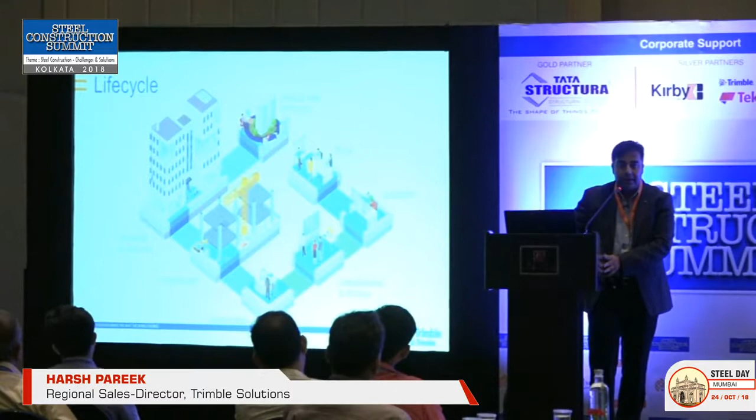I represent Trimble, and what Trimble is trying to do in terms of solution side is basically cover the entire construction life cycle. I'm not talking design only - please understand, design is just a part of the overall construction life cycle.

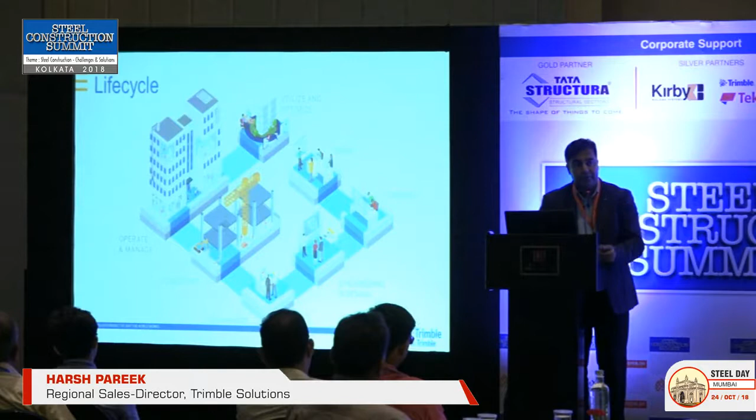In my following slides I will be touching base on some of the stuff which you would have heard many times in recent times. However, right from the conceptual design to operation and maintenance and overall utilization and optimization of your space - how we achieve it, that's the goal Trimble as a solution provider is trying to bring in.

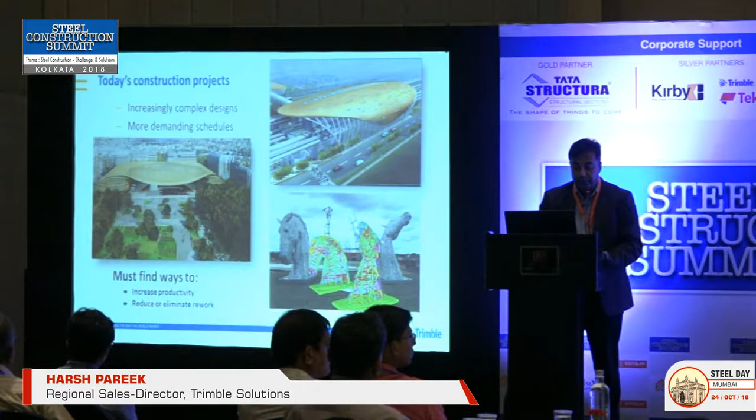So the two aspects which we definitely need to find ways out is: how do we improve our overall productivity, and reduce the redundancy in our overall culture of the way we work. That is where we spend our maximum time, that is where we waste maximum of our time.

Sometimes I can be very provocative - I am sitting in front of people who are our users. However, it is the fact of the matter that we definitely lack in communicating our design intents. How do we manage our information? That is still very, very manual and rudimentary - the way we manage information transfer, emails, fantastic ways we still consider. But I think now the systems have changed quite a bit. And the change coordination is still a big challenge.

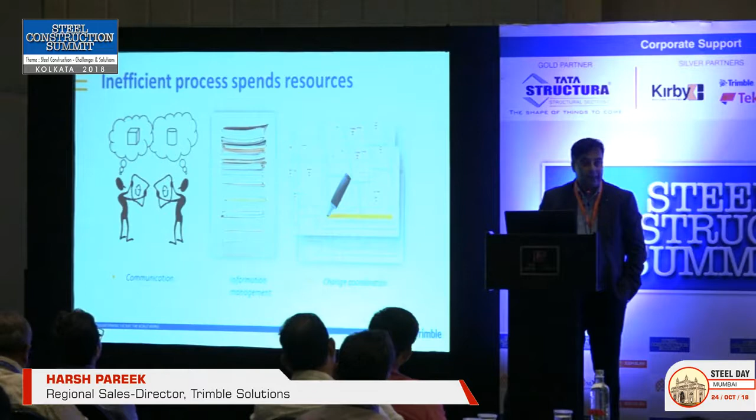Document-based approach, we are still following up. There is no denial - I think everybody, architects, engineers, fabricators, detailers, we are still following this approach. So what is the way forward?

The way I see from the technology side and the kind of development which is happening - I worked with the fantastic design solution provider called Autodesk, and now I work with a set of company which primarily provides in construction, which is Trimble. Everybody is focusing on the digital way of driving the information exchange.

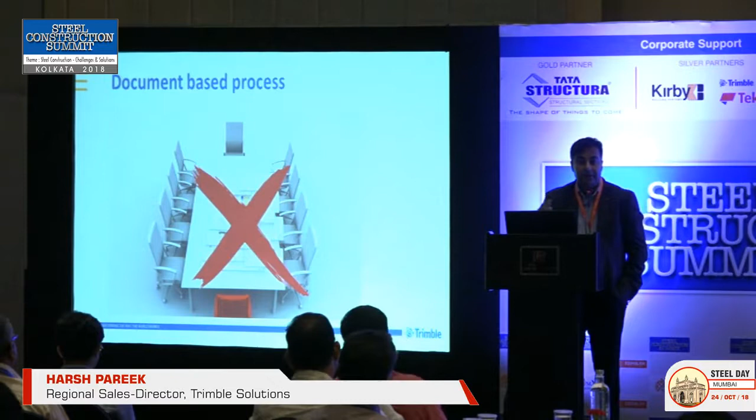And that is where we see this chart is very relevant. If you look at the overall construction life cycle and the different stages of it, right from strategic definition to concept design to technical design to commission handover in use, at every level there is a repetitive job of creation of information which happens.

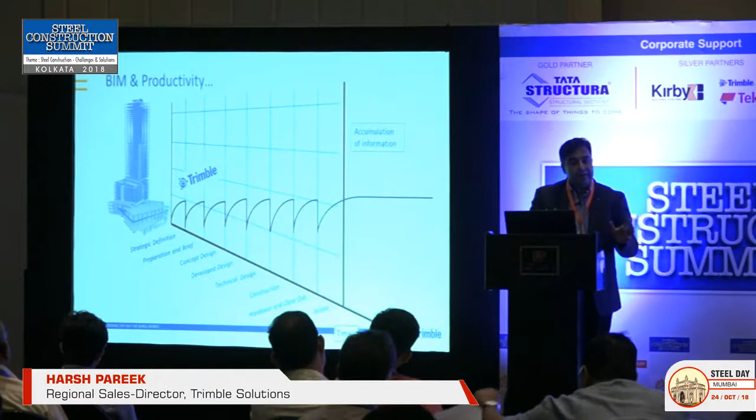Architects create something, a concept, and when it comes to the detailed stage, I don't think that conceptual model, we use it or reuse it. I think we try to redevelop everything from scratch. Once the architect finishes the job, when it goes to the structural engineer, nobody wants to reuse that model which the architect would have done, or the MEP engineer would have done. The contractors would just be depending on the set of drawings.

Coordination is absolutely - though we say we coordinate it and somehow it is working, but going forward, if we continue to do it, it is the right time that we adapt to these new changes. And what this new era is going to change is that the accumulation of information which is happening at every stage, we basically try to streamline, and you can see the clear growth.

That is the primary difference between a manufacturing segment and a construction segment. Steel is all about manufacturing process, right? And even concrete nowadays needs to be on that path where the information - we call it PLM, a very known word, product life cycle management. And here we talk about CLM as construction life cycle management.

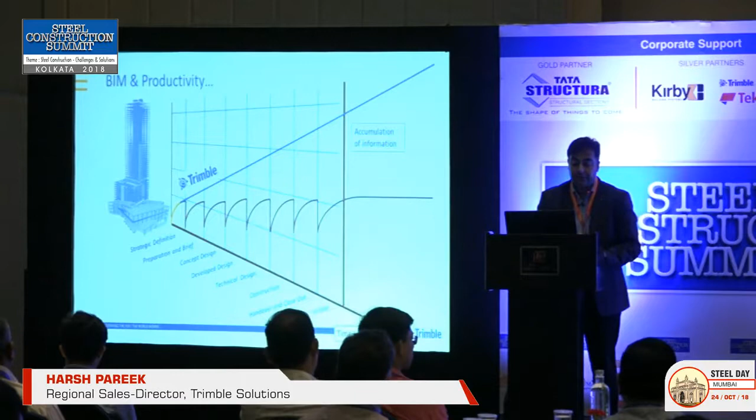If we want to improve our overall efficiency and productivity, then I think that single source of truth needs to be utilized at all the stages of our construction life cycle. So what I am introducing is a term called constructability.

How many of you have heard about BIM, B-I-M? I'm sure everybody talks about BIM. Yeah, it is necessary. It's a building information model.

However, the right benefit of BIM models is not being seen in practice in India as of today. You know what is the reason? Because I have lived in both the eras, especially on the technology side.

The problem is BIM is still being catered only to the design aspect of the problem. And the person who is actually making the structure, who is executing it, for him it is of no use today. For him it is like, I just need the drawing, I need to execute it, why should I use it? But that is the aspect I'm talking about, why he is unable to use the information created by a designer, because the designer's responsibility is only up till the geometric level, not at the constructability level.

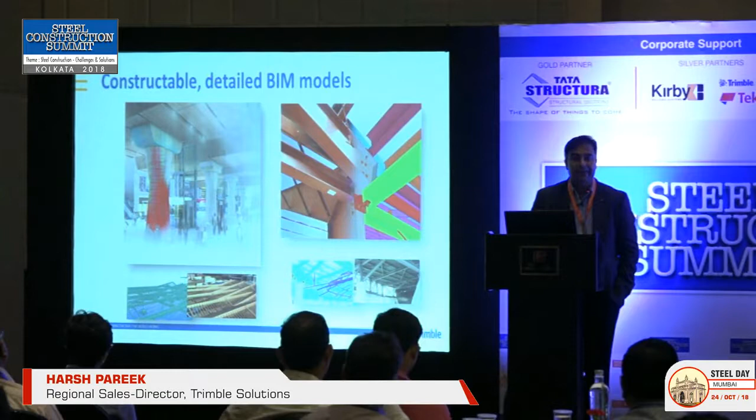So let's take an example. On the left-hand side, what you see is primarily a concept model. It's a very crude way of representing the stuff, please excuse me for that. However, I'm just giving you this.

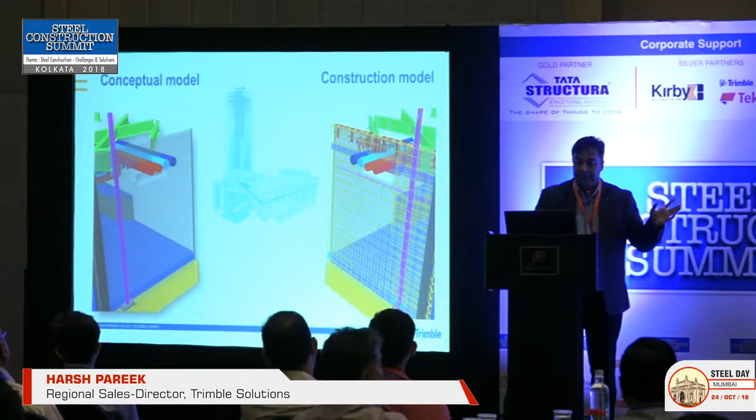When a structural engineer's engineering responsibility is primarily up to the LOD, level of detail 300, what is that? That I will only limit my responsibility up till the geometric aspect of the design.

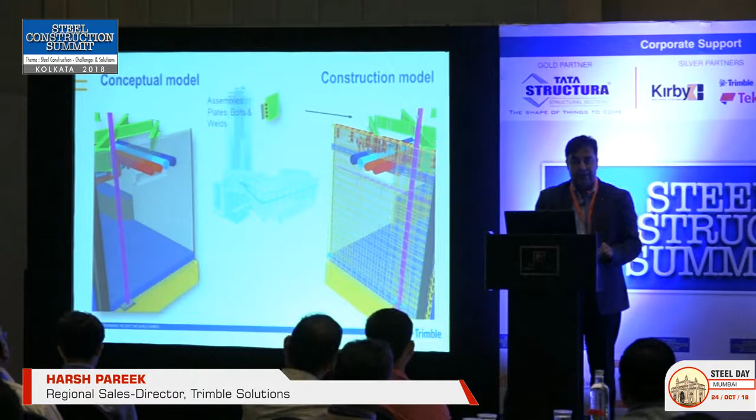But when it goes to construction, people are more worried about how the plates are going to be fitted, how the bolts are going to be fitted, how the welds are going to be there, where my embed plates are, how, if it is a composite structure, concrete and steel, how the concrete embeds are going to be there, how my MEP and plant design comes, so what is the reinforcement?

Reinforcement is an important part. Tell me how many architects or engineering organizations have a 3D rebar model in their scope of work? None. And when you give it to the contractors, because their scope of work is more, they are more worried about concrete and steel quantity. So they say, we don't have a 3D model, and we will just do it whatever the drawing says.

But that is where they are unable to utilize the power of BIM, and that is what I say, because the current set of solutions most people are using limit their capabilities of use to LOD 400 and 500 level of detail, what I say.

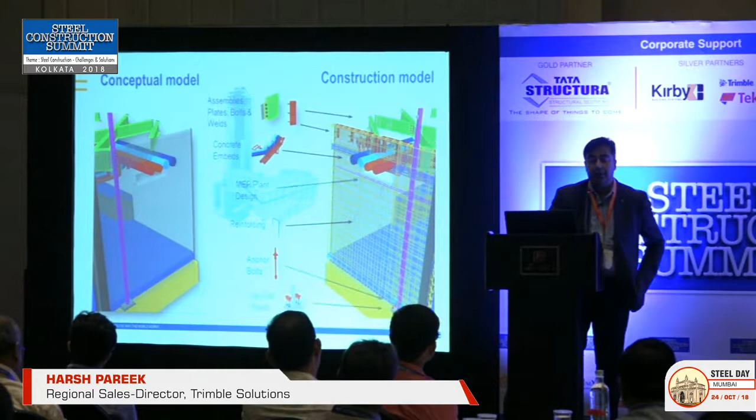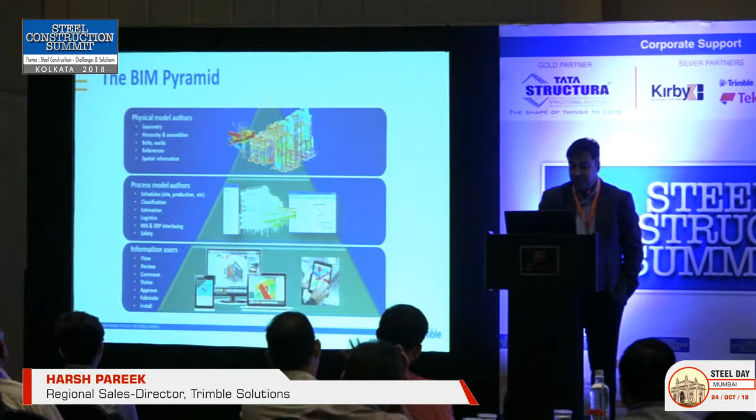So please do not think, why should I do a 3D model, or why should I have a digital model available, not a digital drawing. Even though the drawings are digital, the systems are changing more towards the digital side of it, which is on the 3D concept, and this will be used all across planning, design, construction and operation phases.

I'll just give you a matrix which we do when we do our analysis while developing a product and developing the overall set of solutions for the industry. How do we take it?

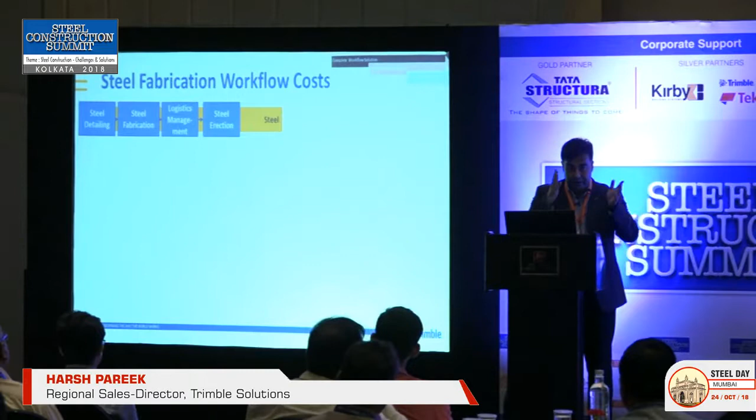Steel fabrication workflow, how the cost is allocated. So there are 4 processes I have written here: detailing, fabrication, logistic management, and steel erection. 4 processes with respect to steel structures.

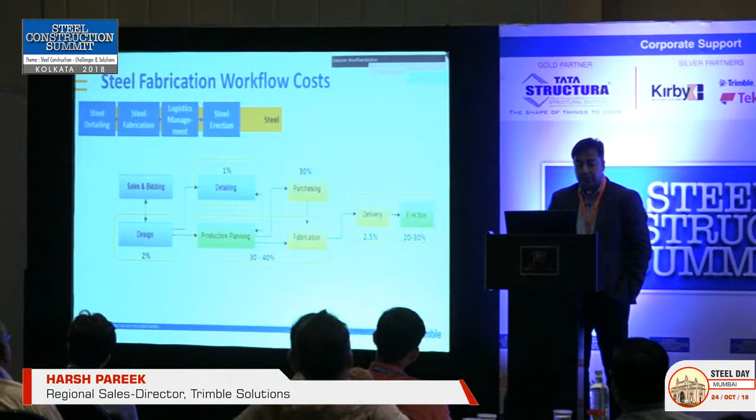This is a study being done by various agencies. And look at this, how the cost is there. People who are focusing more on the detailing and design side, see the cost implication of it. How much time do I have?

Okay, right. So you can see where we are focusing more on the detailing and design side, most important. However, look at the cost associated around that. If you look at the other side, which is production planning, purchasing, and fabrication, it's 30 to 40% of the cost. So this 3D asset, a model having all the information, can create a significant impact on the fabrication side, and lastly on the delivery and erection.

This is a study, probably I can share this. So it very clearly says there are 2 studies done, one by AISC, another by Steel Construction. Both of them are very clear that it is not about detailing and design, it is about the overall process where the money lies.

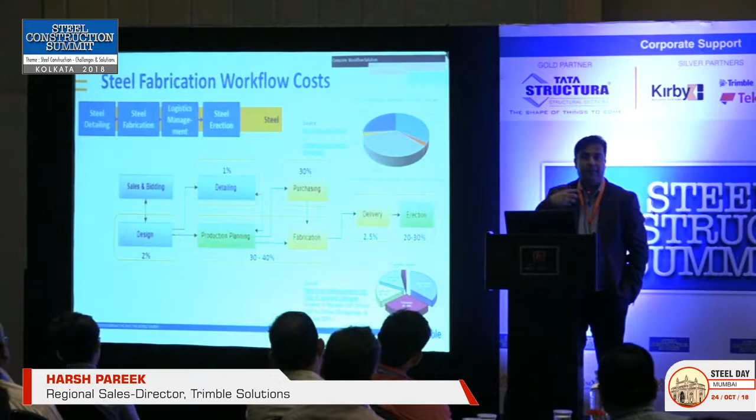If we are able to save even a fraction of what we are spending, I think that is where the value of this overall system lies. So please understand this concept when companies like us say, why don't you do this thing in 3D? It's not about it being forced, you do detailing by this method, not required, because the real value lies there.

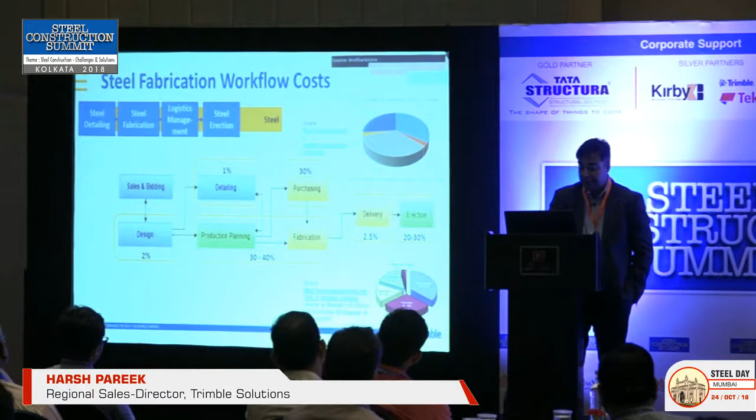You are able to win more projects and show more value to the customers. So if you look at it on the design side, it's whether the cost of detailing or value of model. I would call this a value of model.

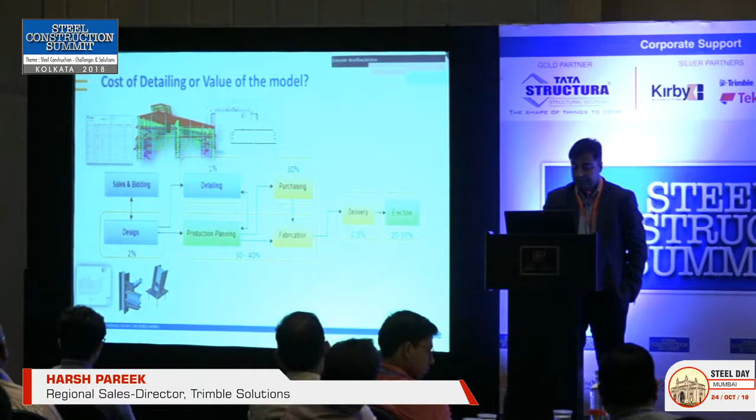Within one model, you have your byproducts: your quantity estimates, your drawings, your connections as mentioned, the automated connections, parametric, anytime you make a change, it changes. Then you have the complete assembly line, linked with your fabrication, and the overall plant is ready.

So you can say it basically increases your chances of winning the project by 10% at the design stage. At the detailing stage, 70% reduction of your cost of rework. However, look at the other side of it, 80% reduction of fabrication man hours. That is where, if we want to reduce the time frame, if we want to be on time and budget, that's where it comes into the picture.

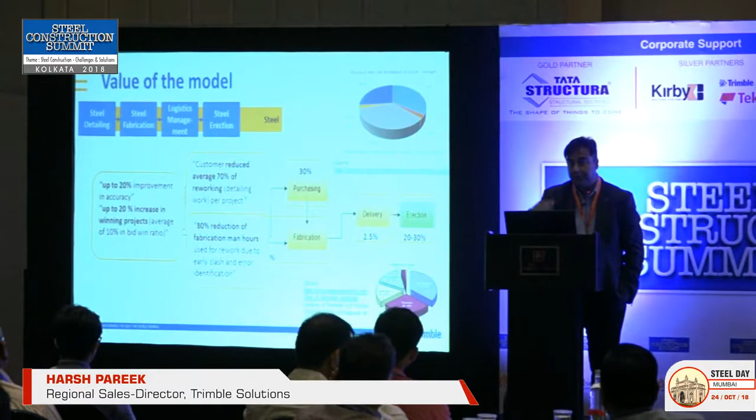And on average, 30% time saved annually, and 25% tons of material saved. These are studies being conducted by various organizations all across, and this is the blended result of it. So that is why it is important, when we are changing or challenging ourselves to move to a different process or different material, that we choose the right intent behind it, why it is needed.

And the value of the model is we can always share it with different stakeholders at the project level. So this is the solution we talk about.

Tekla is not a new product. Worldwide, the software is being used, but the extent to which we are taking it further is new, because it was initially perceived that this is detailing-specific software. But if you actually start unleashing its potential, it gives you value at every stage. And now we have recently added a fantastic tool called FabSuite, which is an MIS tool specifically for fabricators, nicely blended together with this solution, and will be a part of this.

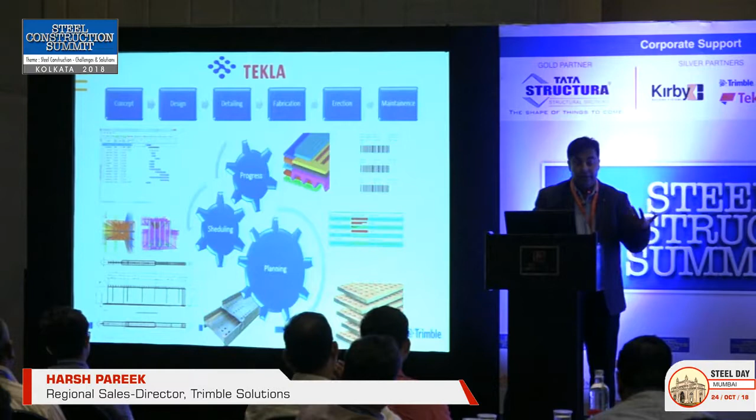Not only this, it's also integrating with analysis and design. So it is not only modeling, detailing, and fabrication, but it has fantastic connectivity with analysis and design, which takes care of your connections as well as your members. There's direct linkage with your PLM and CNC machines, FICEP machines, any kind of machine you have, it has direct linkage with that.

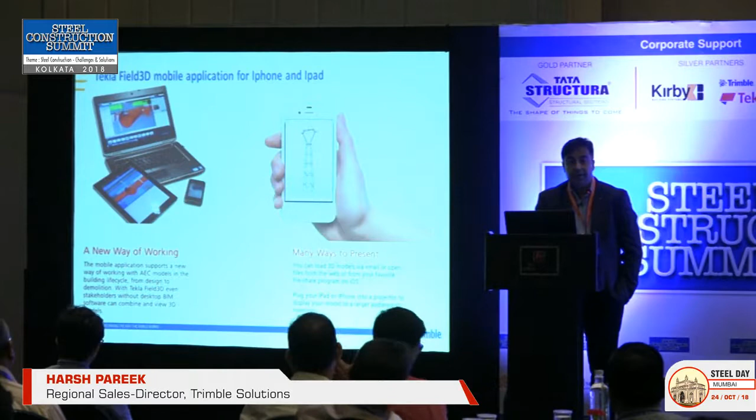Now we have solutions, especially mobile applications. Same models, you don't need to be on the laptops. If you have smartphones, the same models can be transferred at any point in time. You can actually review this.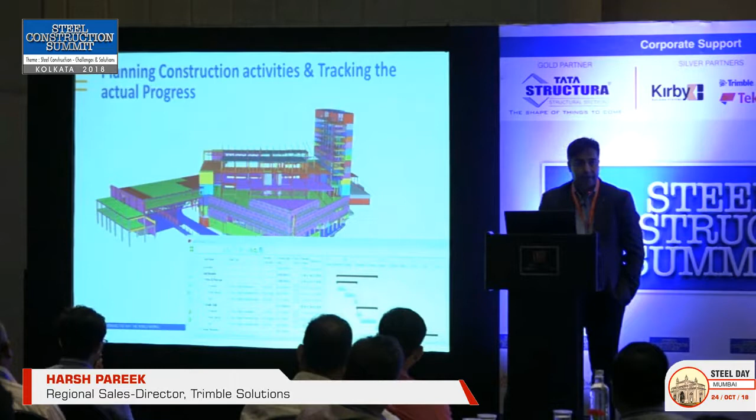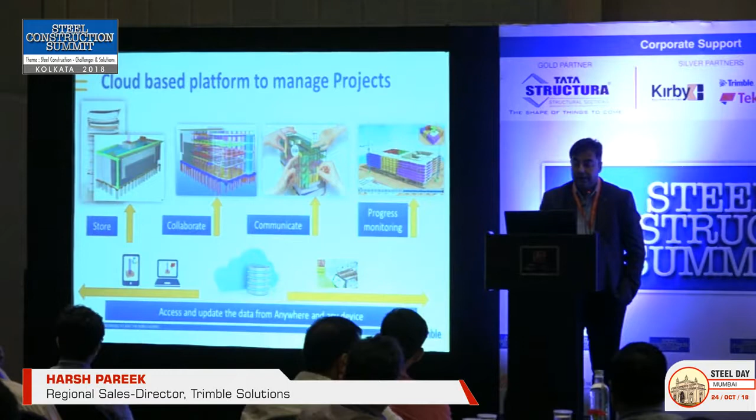And it has got 4D and 5D, like cost and time planning also built inside it. So you can plan your sequencing and logistics here. And we are also having a blended cloud-based platform, so anytime, anywhere, you can access this information, not necessarily need to be in the office.

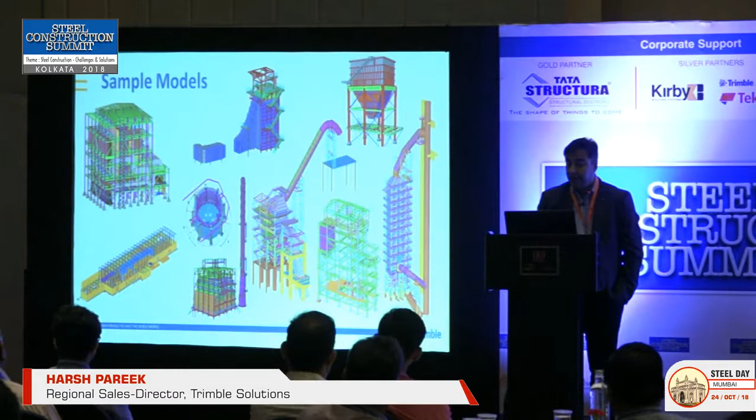Some examples that show our credibility, what basically it can give you. I'm not showing the detailing output because Tekla detailing has been used for several years for producing fantastic detailing, but I'm just showing you the extent of the kind of models you can complete.

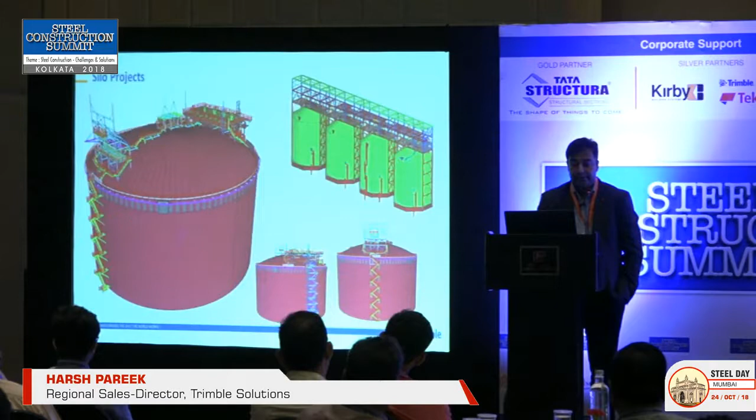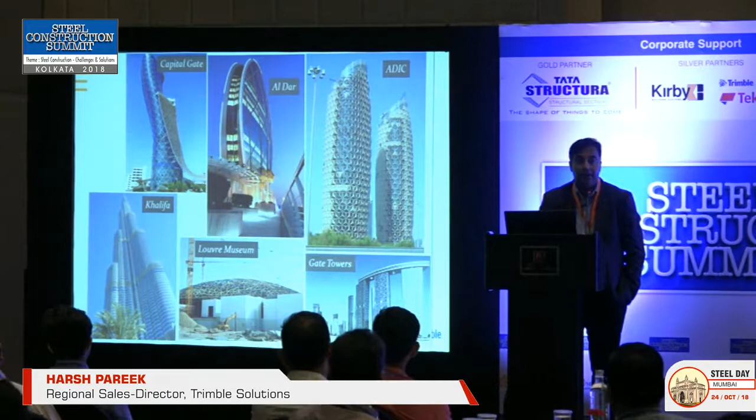So these are sample models: pre-engineered buildings, boilers, heaters, ducting, conveyor projects, silos, some of the tallest buildings in the world, all being done in Tekla solutions. Most of the structures you see, the entire thing being done on Tekla and the associated tools.

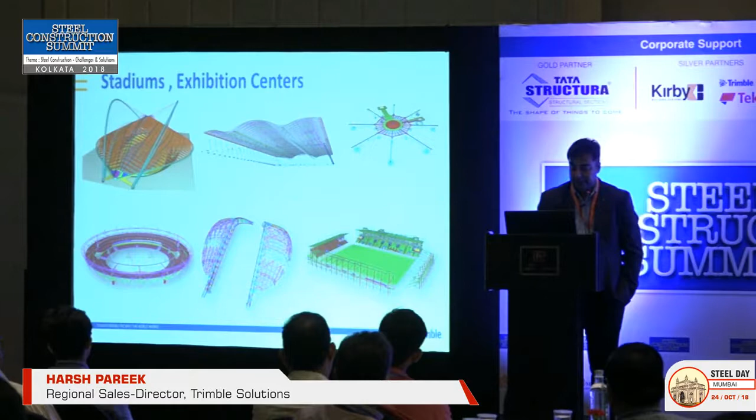Stadiums, exhibition centers—I saw something being shown just in one of the presentations a while ago. Right, we can do tensile structures or any kind of complex thing. Metro stations, an airport, light steel framing, and I'm very proud that there are two marquee projects: Chenab Bridge, one of the highest altitude bridges.

This is being done in Tekla. In Delhi, another project is coming up, the Signature Bridge in Wazirabad.

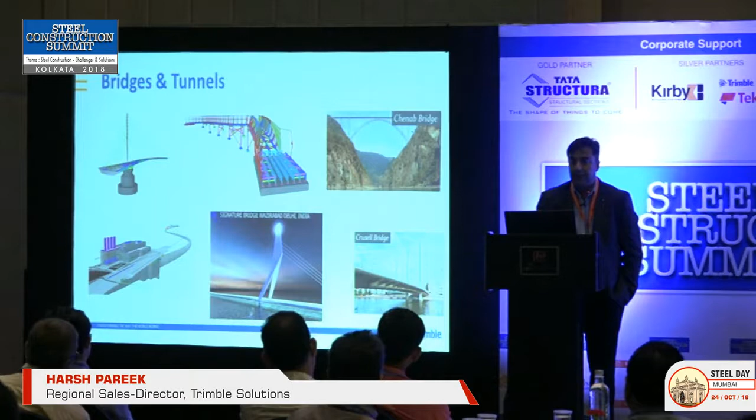Any structure is a structure as far as Trimble is concerned, irrespective of what nature it is, and it handles whether it is concrete or steel, doesn't matter. We handle everything in the most efficient way. Miscellaneous steel works, anything you see, and these are the live projects.

And we have something we call a warehouse. So if you are doing a design, we have a warehouse. I think in India, whatever the type of solution providers providing steel sections, bolts, any accessories, they are all available on our warehouse. You just connect it and start downloading it. So it's a very, very rich tool.

Completely integrated, it overall increases your efficiency. And basically, we all work for business, and it increases our chances of winning business and pushing them on within our time limits. It's a completely open tool.

So if you have already invested in some kind of tools here and there, it is still open because it accepts data from any of the tools you're already working on.

Let Trimble be a partner with you. I'm sure we have done a lot in the steel industry, and we can continue to help evolve this in India as well. Thank you very much.